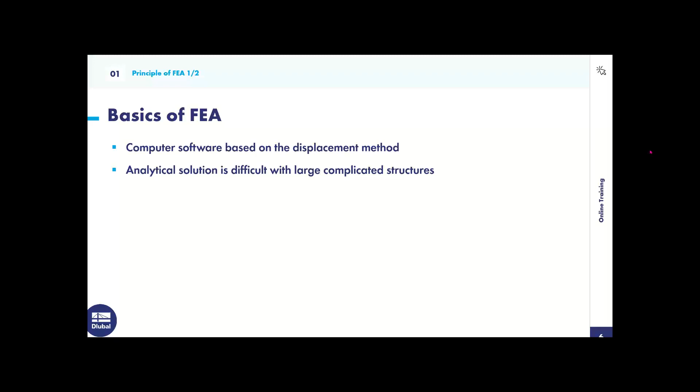So the structure within an FEA is converted to a finite interconnected element mesh, and then the material and cross-section properties are given at each finite element node. Once that's done, the mechanical behavior is transferred between these elements. A word I'd like you to walk away with is discretization. This is where the structure is being submeshed into finite elements.

So now we can go through the FEA calculation workflow. First, the local element stiffness relations or properties are determined. Then the program changes the stiffness relation at each node to the global coordinate system. Then the entire structure is assembled. Fourth, the support conditions are implemented into the structure. Then the displacement vectors are determined. And lastly, the support forces and internal forces are determined.

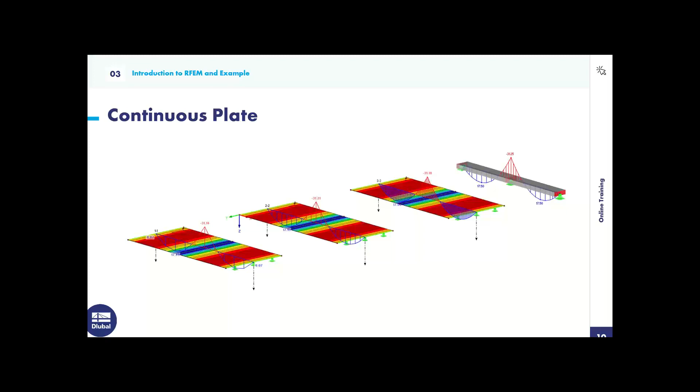So now I will just move into RFEM. One second. And now you should see RFEM. Right now I have an example up, and with this example, I will just be using this so we can go over the UI of RFEM and just the basics like tools and everything.

So to start off, RFEM is a structural analysis software capable of analyzing plates, members, and solids. Deformation, stresses, and internal forces can then be calculated for a 3D structure.

So just to go over again the basic UI, the project navigator on the left-hand side here, this panel is called the project navigator, and this is very important for model data. It includes all of your model data, everything that's modeled within your structure. For example, within this project navigator, things like members, you can expand and collapse all of these folders, such as members, and within these folders we have each member listed. This can also be done for nodes, lines, and materials, etc.

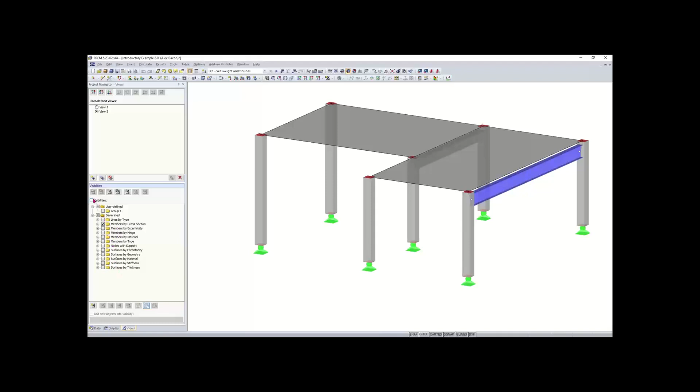The next tab we have is our views tab. Within our views tab, we can create visibilities based on these options down here. So if we turn on visibilities, we can create visibilities based on member cross sections. Right now, if I only wanted to show my W18 by 50, I could do that. Maybe I only want to show my rectangular columns here, or rectangular cross sections, my 12 by 12s. We can do that as well. And then you can also save visibilities, and pull them up whenever you'd like.

The third tab we have is our results tab. If I just run the results for this model quickly, then we will see our results tab pop up at the bottom here, only if we have results ran. So I just ran my load case 1, and if I turn off my visibilities, now you can see in my results tab, this is again similar to the other menus where we have our expanding and collapsing folders. Right now I have global deformations checked off, and we're viewing our resultant deformations.

And you can see we get a nice look at that, and then we can also check out our member basic internal forces, as well as our basic internal forces for our surfaces as well, if we would like. But we'll go over more of this in detail later, so don't feel too rushed to learn this right now. We will be going over all of this in the training. But just want to give a basic overview.

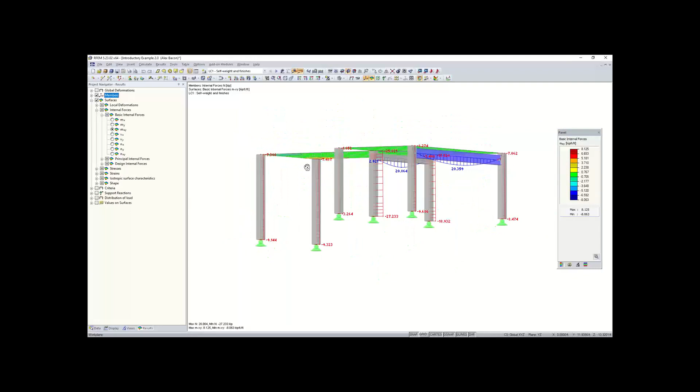Also, controls, very important. If you'd like to interact with your model, if you have a scroll wheel on your mouse, you can zoom in and out with the scroll wheel. Clicking down the mouse scroll wheel will let you move the model in translation. Holding control and clicking down the scroll wheel at the same time will also allow you to rotate your model. If you don't have a scroll wheel on your mouse, you can use the arrow keys on your keyboard to move the model around in translation. You can also hold control and use the arrow keys to rotate the model. And if you want to zoom in and out with the keyboard, you can use the plus and minus buttons.

One more thing before we get into modeling, I would like to go over highlighting. If you highlight from right to left, this will give you a purple box, meaning that anything that touches this purple box will be highlighted and selected. Highlighting from left to right, only things that are fully engulfed into this red box will be selected. So that's the difference between the two highlighting boxes.

So now, before we go into the model, I can go back to the PowerPoint. And I just have another question to ask before we get into the model.

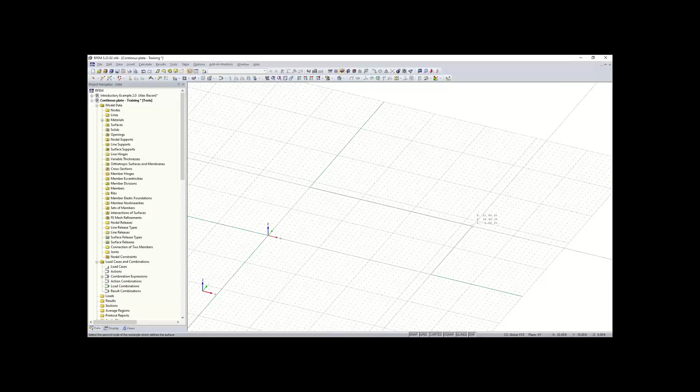Now you'll see that your cursor will turn into a reticle. What I can do is left click anywhere within this grid, and you can see the reticle snaps to these grid points here. I can click and draw this surface, and this surface is going to be 32 feet by 16 feet. So I'll go 32 feet in the X direction, and then 16 in the Y direction. Then I can just click, and you can see that this surface has now been created.

One thing I did want to change - if you need to edit your surface at all, or anything that you place within RFEM, you can easily edit it by right-clicking on it and going to Edit, or you can also just double-click on it. So I do need to change the thickness of this plate to 12 inches. I can easily do that by simply double-clicking on it, and you can also change your material and other things as well. So I'll click OK.

Now we can create the same plate again above this original plate. I can just go up here to my rectangular surface tool again, click OK, and now I'm going to model a second plate 5 feet above this one. Then I can click and just drag my cursor, make sure that this is 16 feet wide. So that will be right there. Now we have our two plates here modeled within the XY plane.

We'll go over work planes later in the training. So then we can simply create a third plate pretty easily, and to do this we can use our move and copy tool.

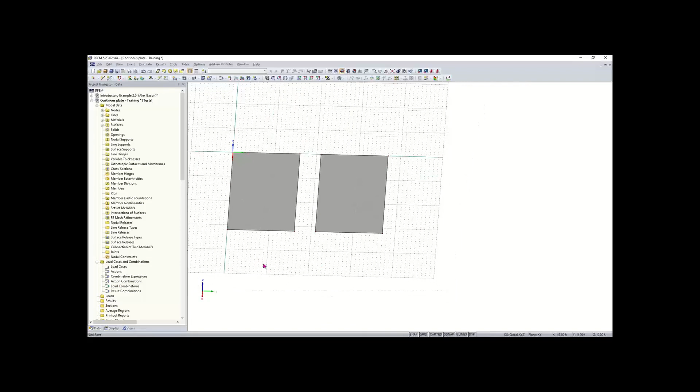So what I can do is rotate here, and I can simply just highlight the second plate, right click on it, and click move/copy. What this will allow me to do is make a copy of this plate and then just move it wherever I would like using displacement vectors here. I'm going to use this select 2 points and return, and this will give me a displacement vector by selecting the 2 points graphically.

So now I can just simply create one copy of this plate, and then create a displacement vector graphically - I'll select my bottom corner here, and I would like this copy to be 5 feet above this plate. So I'll click that, and I'll click OK. Now you can see that the copy was made, and it was made based on that displacement vector that I selected.

So the next thing we want to do is create our continuous beam. To do that, we're just going to be creating our member. You'll see that my plate is hanging off the edge of my grid, so to change the amount of grid points you have, or to expand this grid, we can simply go up here to our tool.

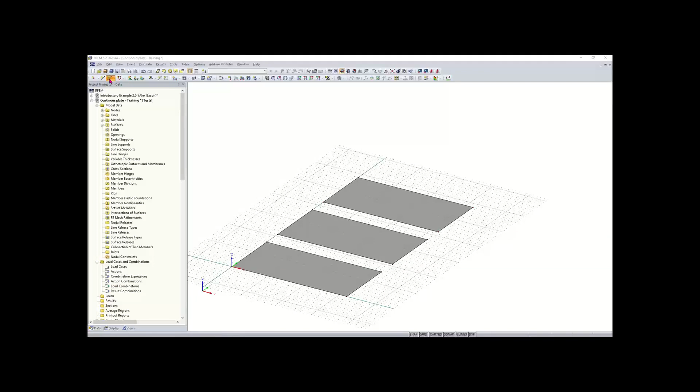And then once we click on that, we have our new member dialog box here. And we have basically a lot of information, but the one thing to focus on is just to input what our cross-section is going to look like. So we can just go over here to this button called Import from Cross-Section Library. We'll click on that.

And then this is similar to the material library, but you can see that we have our cross-sections here. We have rolled, built-up cross-sections, parametric thin-walled, parametric massive, and parametric timber cross-sections, as well as some other options down here as well. Right now, we'll just be focusing on our rolled I-sections here. Actually, my mistake. We will not be using the rolled I-sections. We're going to be using the, right here, the rectangular parametric massive sections. So we'll click on that.

And then once I click on that, you can see that I can enter the parameters for my cross-section, like the dimensions. So I can enter what the base is going to be, which is going to be 40 inches. And then my height is going to be 12 inches. And now you can also see down here that our material is by default set to 4,000 PSI concrete. So it's also per the older ACI standard.

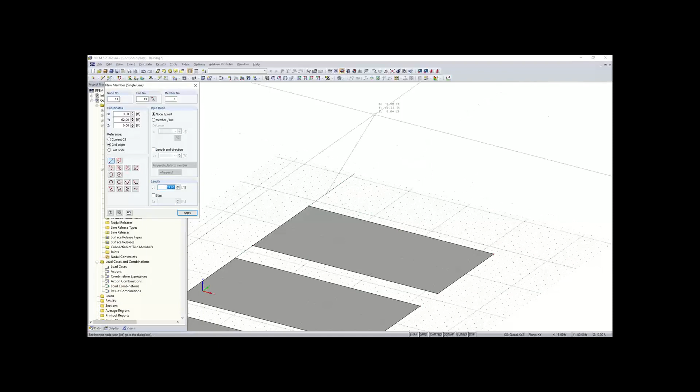And now we can simply just draw our cross section on our grid here. Again, the cursor snaps to these points. And I'm going to add this beam 5 feet away from my third plate here. So I'll left click, and now you can see that I can just draw, you see this line here, I can draw my beam, and it's going to span the same length as our plates here. So I'll left click again, and now you can see that our beam has been drawn. And now we have our 3 plates in our continuous beam right here.

So the next thing we want to do is we want to divide these lines here on the edge of our plates, so we can add a midspan here for supports. We also want to divide this continuous beam, so we can add a middle support as well. So to divide the lines, we can simply just right-click on the line. And again, when you right-click anywhere or on any object, you get this shortcuts menu. So we can just right-click on this line to divide it. And then we want to go up here to divide line.

And you can see under divide line, we have multiple options for dividing a line. So we can do it by distance. And you can see when I pick that divide line option, we have these gray arrows here on your lines. And these arrows tell you the orientation of the line or the direction that you drew the line. So this would be the start, and this would be the end of the line. You can also view these arrows by just hovering over any line that you've drawn.

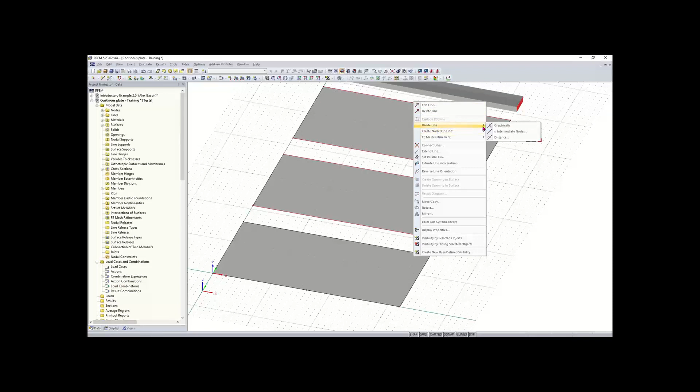So now we can do this for the rest of the lines, and we can easily just hold Control and select the rest of these lines here. Right click. So holding Control and selecting options will allow you to select multiple options. And then we can just do this by a distance again. Everything's set here. You can see the multiple lines have been selected. I'll click OK, and now we have these nodes placed in the middle of our lines here.

Now we would just like to divide our continuous beam up here. It's similar to the lines. I can just right click on the beam, go to divide member, and the third option would be graphically. So graphically just allows you to select graphically where you'd like to place the node. I'm going to place it right in the middle here at 16. And now you can see that our member here has been divided. I'll rotate the model to get a better view.

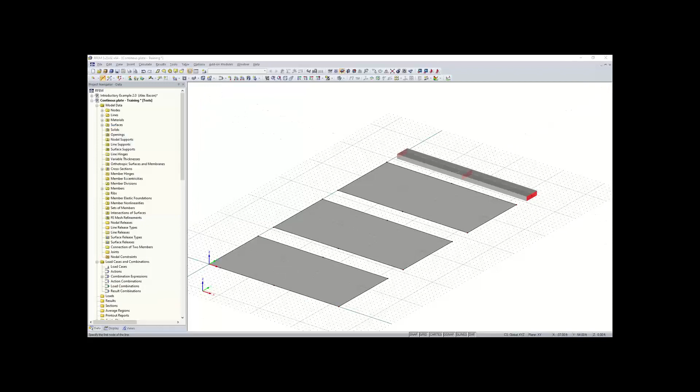And now that our members and lines have been divided, for our plates, we can draw a line down the middle of them. And the reason we are putting this line down is to later on add a line support there, so we have some mid-span support. So we have an option up here called New Line right next to our New Single Member button. So I'm just going to click that.

Now you can see this box opens up here, and what we can do is just draw our line within our work plane here. I'm just going to select snap to and select this first node here, and then I'm going to draw it and snap to the second node. And you can see we have a nice perpendicular symbol there letting me know that the line is perpendicular. And I can right click anywhere or hit escape to exit out of that tool. And now you can see that our line was drawn.

So now that this line has been placed, instead of having to redraw it, we can simply just click on it and hold Control. If I click on something and hold Control and then drag it, that'll make a copy of it. Oops, let go of Control too much. So this is a great workflow for working with anything in RFEM. You can simply just highlight something, hold Control, and then make a copy of it and drag it and snap it to anywhere. So it's pretty efficient.

So now we can add in the nodal and line supports. First off, we'll add in our line supports for our plates here. And to do that, we can go up here to New Line Support. And this line support is going to have certain conditions to it. So what we can do is click on this button here called Create New Line Support. And you can see here that we have our support conditions down here. Basically, this first section here is for fixing your conditions in translation, or you can also fix your degrees of freedom in rotation here.

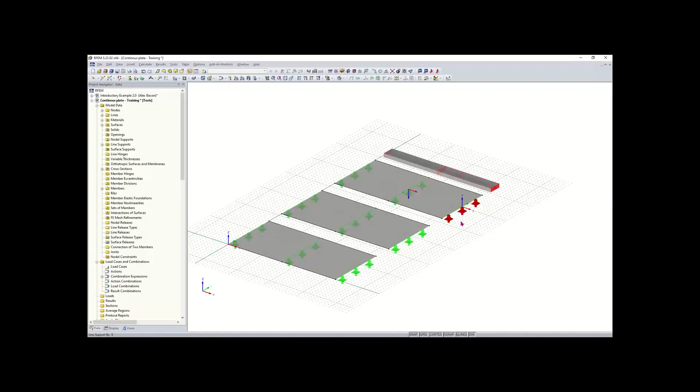Now we just need to add nodal supports to our beam here. So we added line supports to our plates. Now we want to add just nodal supports. So to do that, we can go up here to New Nodal Support. And you can see by default that hinged is already selected here. So instead of having to go in and create a new nodal support type, we have hinge selected already. So we can hit OK. And now we can select our first end node here, and then we can select our middle support.

And this last end support is going to have different conditions than these two supports here. So we can go up to nodal support, and we can create a new type of support. This support will be the same as a hinge support, but the rotation about the local x-axis will be restrained. So I'll click OK again, and now you can see that that support is a little bit different. It can't rotate about the x-axis, so it's locked. And now all of our supports are defined.

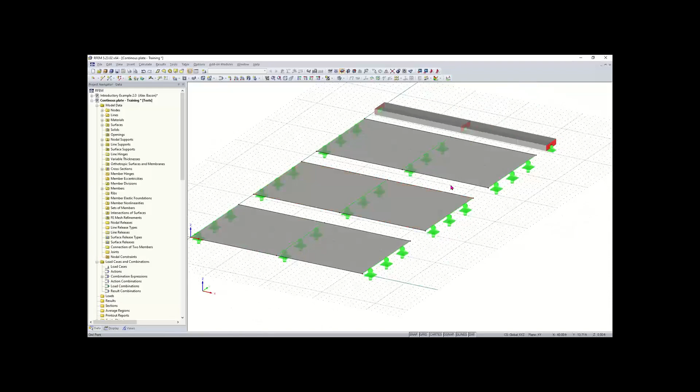So now that our supports are defined, we can get into loading. So now we would like to load these plates and this continuous beam. It is important that we create a new load case because every load within RFEM needs to be assigned to a load case. So I can go up here to either edit load cases and combinations, or we have a button here called New Load Case. So I'm going to click on the New Load Case button.

You can see the program has automatically created a new load case for me already. For this load case, you can add a description here, and for this one, I'll just call it dead load. And you can see the action category is set to dead. We don't need to worry too much about that right now. But right here, you can see we have an option for activating or deactivating self-weight. So for this example, I'm going to deactivate self-weight. And now our load case has been defined, and we can click OK.

So now you can see up here we have our drop down telling us which load case we're under, and you can see I had load cases and combinations automatically generated based off of standards. So now the program has generated some load combinations and result combinations, but we don't need to worry about that right now. We just want to stay under the dead load so we can add loading to these plates and continuous beam.

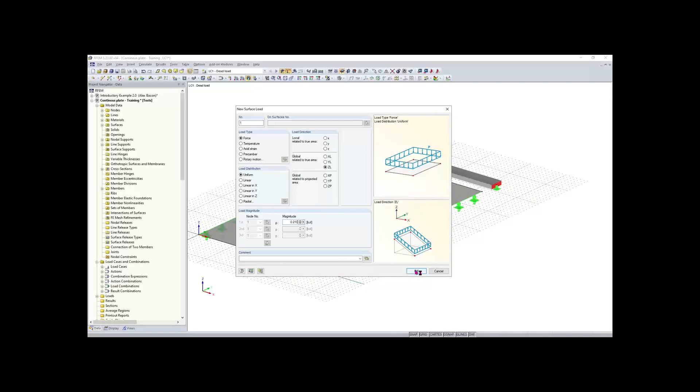And now we just want to add a magnitude to our load. So this will be a magnitude of 0.21 KSF. And now we can click OK. Once we click OK, you can see that my cursor has changed here, allowing me to select surfaces within my model. And once I click on a surface, you can see that those loads are being generated onto the surface.

You can also notice that my loads are pointed up in the positive Z direction. I would like those to point down, so what I can do is simply highlight them and double click on them. And then I can add a negative sign in front of my magnitude here. And once I click OK, you can see that the loads will be swapped.

Next thing we want to do is add a uniform load to our continuous beam here. Again, up here with our tools, I want to choose a new member load. Keep in mind that the member load tool is for members only, and the new line load tool you want to use only for lines, when you're applying loads to the perimeters of surfaces, for example. So we'll choose new member load.

And again, this is similar to the surface load, where we will have a force as the load type. The load distribution is going to be uniform, and the load direction, again, is going to be in the global Z direction. I'm going to add in a magnitude of negative 0.21, which will be kips per foot. I'll click OK. And now you can see that my cursor has changed, allowing me to select my two members here.

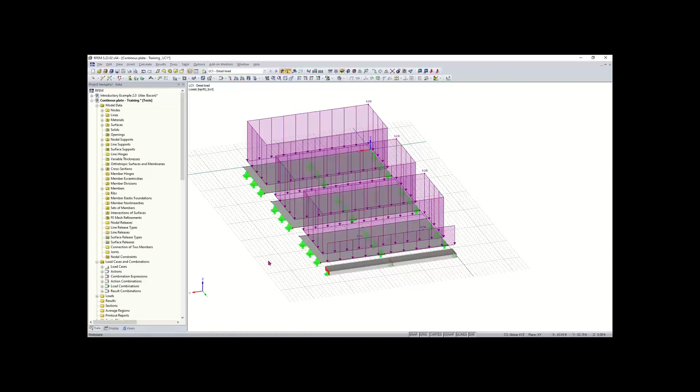Okay, yeah. So if you've drawn your loads here and you want to edit them, you can simply just double click on them. If you just double click on one, that'll allow you to edit just one load. Also, if you need to highlight all of your loads or a couple loads at a time, you can highlight them and then double click on them, and that will allow you to edit them.

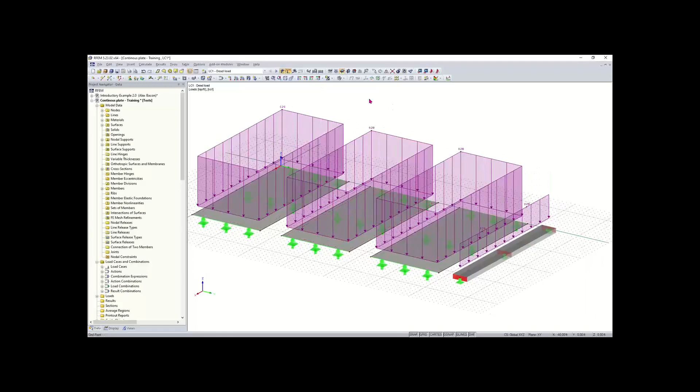Great, thanks. You're welcome. Yeah, so now that we have our loading, we can now move on to creating FE mesh refinements. So within the program for surface elements, an FE mesh is generated, and right now our FE mesh is set to about 1 foot for the length of our finite elements. If you're a little confused by that, we'll get into more of that later. But for now, we would just like to add an FE mesh refinement, which allows us to change how fine our FE mesh is going to be for individual surfaces.

So to do this, I can simply just right click on my surface here, go to FE mesh refinement, and then click on new. And for this, I'm going to just create a new FE mesh refinement here using this button called create new FE mesh refinement. You can see that surface 1 is selected, so I'll click on that. And right now we just have surface selected, which is automatically done by the program, and we can set our target FE mesh length.

So I want to set mine to 0.2 feet. This is smaller than the 1 foot default that is already selected globally in the program, so I'll click OK. I'll click OK again. And now you can see that we have this little icon here telling us that an FE mesh refinement has been applied. Now we want to do that same thing for our other 2 surfaces here.

Again, we can right click on this surface and add one, but we can also go into our project navigator here on the left-hand side, and we can scroll down to FE mesh refinements. I can expand that, and you can see we have one for surface 1. I can right click on FE mesh refinements and click on new FE mesh refinement.

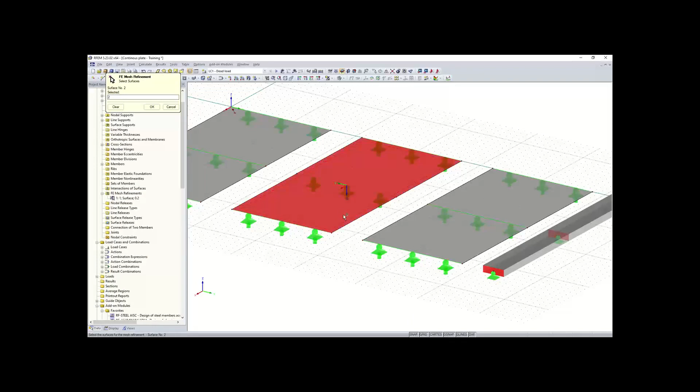And now I can just click on surface. It's wondering what surface I want to apply this to. I can type in the surface number, or I can select the surface graphically. I'll click OK. And for this surface, I just want to increase the FE mesh length just so we can get an idea and compare results later on to see how our results change depending on FE mesh length.

So I'll click OK, and again we get that icon, and then I'm going to do the same thing for this third surface. So I'll just right click on it, and then I'll create a new FE mesh refinement, and then I'll just make this 0.8 feet. So you'll see that they'll be increasing down the line. I'll click OK again, and you can see that that icon has been placed there.

We have another quick question unrelated to the FE mesh, which maybe you can just address quickly. Okay. One of the attendees noticed that you selected concrete for one of the materials. They're wondering, what does the RF-CONCRETE add-on module do then? How is the add-on module different from RFEM is what you could quickly explain.

Okay, yeah, so basically the material for concrete has been selected within RFEM here, and you'll see later on when I run results that in RFEM you just get things like the global deformations, the internal forces, support reactions, etc. But if you want to design, let's say, your slab here for reinforcement, that's when RF-CONCRETE Members or RF-CONCRETE Surfaces would come in. So we have 2 different modules, one for surfaces and one for members. So basically the add-on module is for designing the reinforcement.

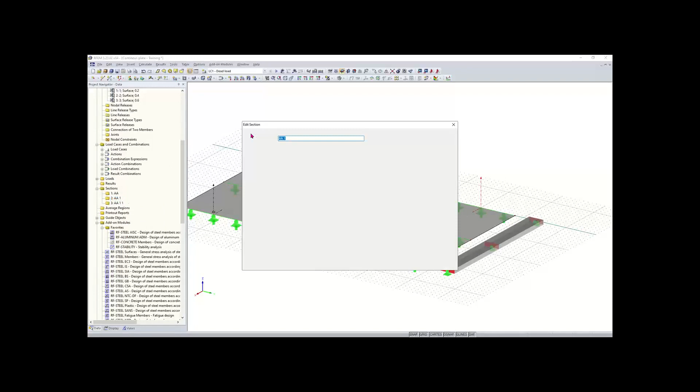You can change the section name if you do that within the project navigator by going over here to sections, and then you can simply edit a section and rename it. I'll make this one AC, and then my other section will be AB. Yeah, so click OK, and now everything is basically ready for calculation. So we have our surfaces and members along with our supports and loading.

So again, you can turn off the loading, like I don't have mine shown right now, but you can turn on and off the loading up here with this button. I'll turn it off for now. And now we can go up here to our toolbar and we can click on this button called Calculate All. So once we hit Calculate All, the program will go through and run the calculations. It should only take about a minute or two. It all depends on the size of your model and the complexities.

And then once this runs, the first thing we should see is our global deformations, and those should be shown. And then we can get an idea of our internal forces and things like support reactions. So now you can see that we have our global deformation shown right now. You can see we get a panel over here on the right-hand side. And this panel is basically the legend for our colors here. And you can see that we have a max displacement of 0.022 inches.

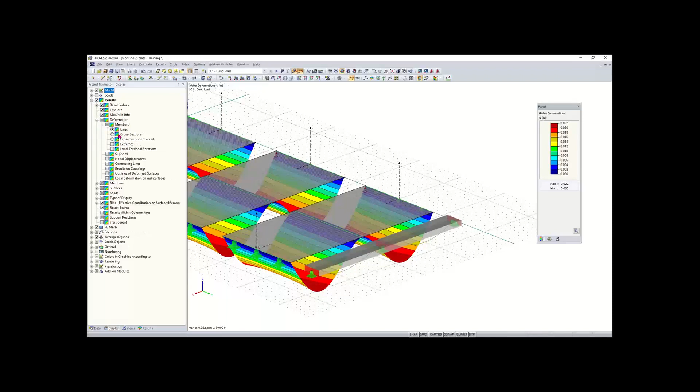And then we can also view the deformations on our member here. Right now, we just have that set to a yellow line. But if we wanted to have a colored cross-section for this deformation, we could go to Display, and then we could go to Results, Deformations, Members, and we could select cross-sections colored. So now we get a nice color section here.

We can also take a look at our member internal forces. So I can check member, and now I can just look at my axial forces. Right now we don't have any. I can get a look at our moments, and we can get a nice moment diagram there.

And we can also take a look at our internal forces of our surfaces. So we can view the basic internal moments along the x-axis.

Every element has a local axis, referred to with lowercase coordinates. If I hover over any element, it'll give me the local axes for the plate. If we want to see the local axes of our member, we can right click and click on local axes, and now we'll get that for all of our elements.

So I can right click again. Quick question, one of the attendees is asking how to find the optimal mesh for the analysis. Yeah, okay.

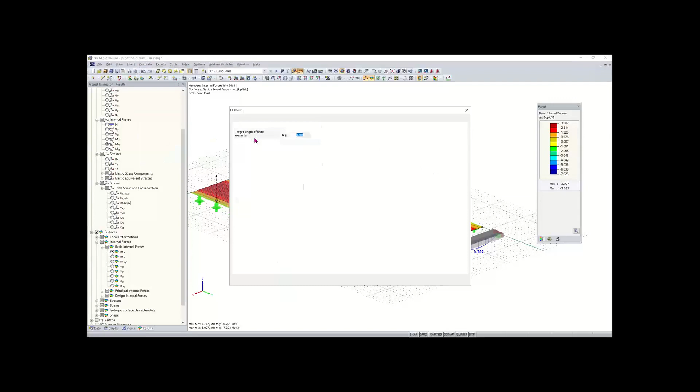The optimal FE mesh for analysis is a little tricky. There's not an actual specific length that you would pick for your FE mesh for a certain model. Basically what you can do is adjust the FE mesh by going up here to calculate, and you can go to FE mesh settings. This is the global FE mesh settings for your model, and here we have our target length of finite elements, which you can change.

Finding the correct FE mesh is basically just a guess and check. You can take a look graphically if you zoom into your model at the FE mesh and make sure it looks good. But then also you can run the results of your model with a certain FE mesh length, change the FE mesh length or make it finer, run your results again, and compare those results to see how much they've changed. You can keep doing that until your results don't change, or the difference between your changed results is small.

Exactly as Alex mentioned, it's basically just running a test and trial type process where you continue to decrease the FE mesh. If your results are changing significantly, then you know your FE mesh is not refined enough.

The other thing I wanted to point out, if you go to calculate, FE mesh settings again, the third tab is called Adaptive Mesh Refinement. This is something we're not going to get into today, but essentially the program will run that testing process for you. You can set the number of iterations, the load case or combination to consider, and the program will run a quick analysis in the background, check the results, and refine the FE mesh in certain areas of the model, essentially creating the FE mesh that is optimal for your model.

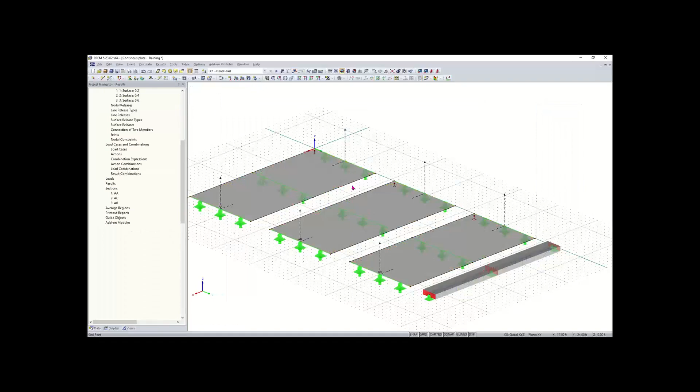Once this is done, we click OK, and it's going to say that this action is going to require me to delete my results. Do I want to continue? I'll hit yes, and now I can rotate my model again.

Once I've done that, now it's going to make me recalculate. And then once I recalculate, you'll see that the results are going to change just a little bit, mostly the bending moments, because instead of RFEM taking into consideration shear stiffness, it's just going to assume an infinite rigid stiffness for the shear. I'll get into that just in a little bit.

So basically, this is because the methods used in school assume an infinite shear stiffness, when in reality there are some shear deformations for bending. So just keep this in mind when comparing hand calculations of deformations with RFEM.

So now back to the PowerPoint, we can go over some plate theory. So now I'll take this back to the PowerPoint. Let's get back to that slide.

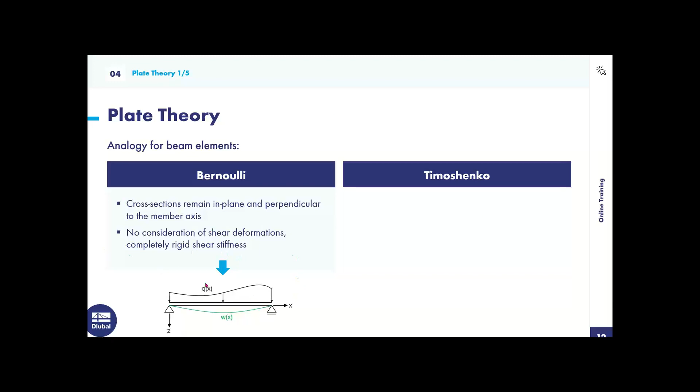These first theories are going to be analogies for beam elements. The first theory is Bernoulli's, and the second is the Timoshenko theory. The assumptions made for Bernoulli's are that cross sections always remain in plane and perpendicular to the member axes, and that there are no considerations of shear deformations, with the shear stiffness being completely rigid for our member.

So now I just want to show a graphic to represent what I just mentioned. Here you have Bernoulli's, and you can see the deformation is perpendicular right here to the member axes. Then for the Timoshenko theory, we have an additional angle, and that comes with additional deformation, due to the additional shear deformations or shear stiffness taken into consideration.

So these two theories we can apply to plate theories. An equivalent analogy for plate elements: we have the Kirchhoff theory, and the Reissner-Mindlin theory. The assumptions for Kirchhoff are similar to Bernoulli's theory, but for plates, and the similar theory from the Timoshenko theory is the Reissner-Mindlin.

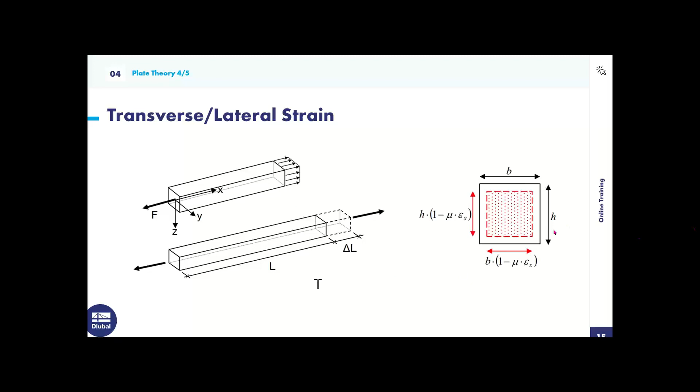Just to summarize, for the Kirchhoff theory and Reissner-Mindlin theory: Kirchhoff normally yields great results when very thin plates are used, for example concrete slabs. You have to keep in mind that this only considers pure bending load-bearing capacity, and this is just a simplified approach. For Reissner-Mindlin theory, shear deformations are considered, and this is better for thick plates, and also when shear influence from components is relatively high. There's also significant error when neglecting shear forces, so this is better for more accurate shear forces and is a higher value approach.

In my opinion, the Reissner-Mindlin theory is what you should be using most of the time, but I just think it's good to know the difference between these two theories.

So now what we can do is move back to the program. And within the program, we can go to calculation parameters.

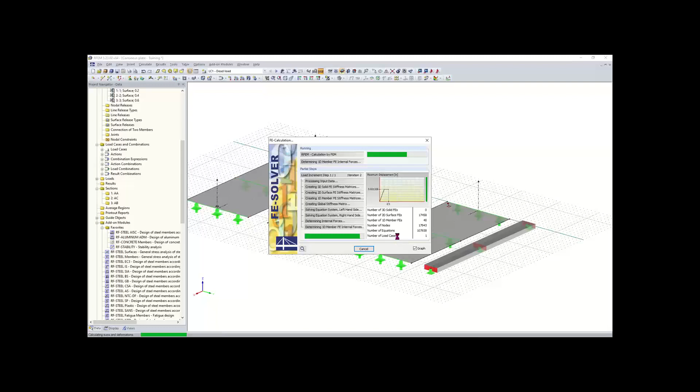Yes, it is possible. That's something I should have mentioned in the beginning. You can change your units of your results, and units in general, by going up here to options, and then to units and decimal places, and this dialog box will pop up. Within here you can change the units of any result. Up here you have tabs, and you can go to results, and then here you have deformations.

You can change the results of your internal forces here, too. You have a drop down, and you can change between any of these units if you like. You can also change your decimal places as well. And if you want to change between imperial and metric, you can do that at any time throughout your modeling.

So those results ran, and maybe you can remember a little bit from the results before, but you can see that they've changed slightly, maybe by 0.1 or 0.2 kip per feet.

So now that we ran that, we can also move on to another question. I'm going to go back to the PowerPoint, and I would just like to give a quick question. One second. So now this question should pop up in the PowerPoint. If you just want to, you can enter your answer in the chat, and I'll give another 30 seconds to a minute for that.

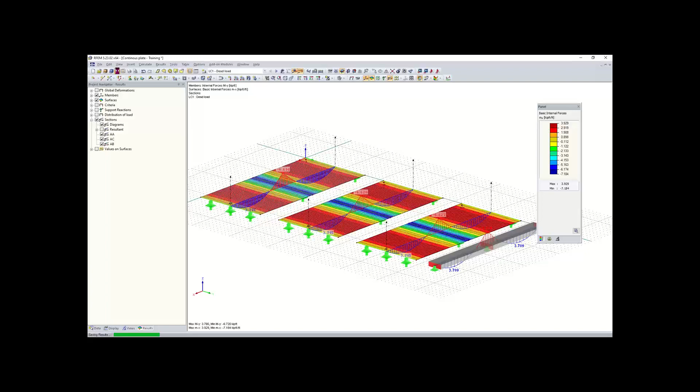So what we can do is we can open up a new model. We can also save our model for our continuous plate by hitting the Save Model button up here. And that'll save our model. And now what I can do is I can click on New Model.

And within this new model general data tab, like I said before, we can just type in our model name. So I'll just name this one Euler Case 1 example training. We don't have to add a description. We don't really need to generate combinations automatically. So it'll also be a 3D model, and everything here is set by default, so that's good. So we'll click OK.

And now we have our blank workspace here. So what we're going to do is just create one single member, and this is just going to have a new cross section. So what I can do is go up here to new single member. I can click on that, and now I can create my cross section here again. So I can go to import from cross section library. And then it's going to be an I section. So I'm going to click on I section.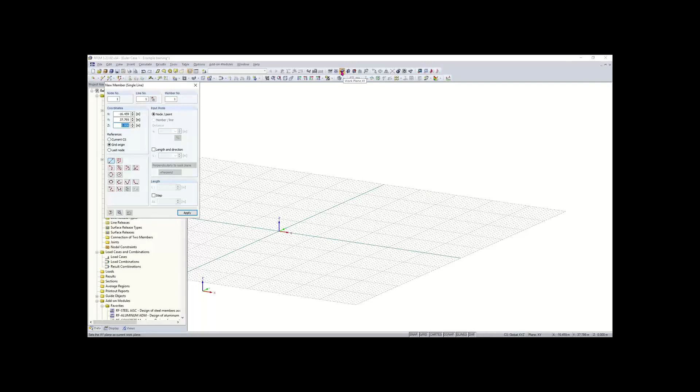And now I can draw my member. So maybe I want to draw my member perpendicular to this grid here. What I can do is I can check off this box here called length and direction, and I can set this perpendicular to work plane if I want to draw it perpendicularly. Or what I can also do is just change my work plane up here using these buttons. So right now it's set to work plane in the X and Y plane. I can change my work plane to the YZ plane, or I can change it to the XZ plane.

I'll keep it on the XZ plane, and now I can just select my origin here by left clicking, and I want this column to be 30 feet high. So what I can do is simply just go up here, left click, and now my column has been drawn. I can right click to cancel out of this, and now our column has been drawn.

So now the next thing we want to do is just add in a rigid support. So I can highlight from left to right this node here. I can go up to nodal support, and right now it's set to hinged. Instead of having to define a rigid support, what I can do is just hit this drop down and select rigid, and you can see that all of the degrees of freedom here from translation and rotation are all fixed with these check marks. So now I can click OK, and I can zoom in here and you can see that my rigid support has been added.

And now our Euler Case 1 has been created. And what I can do is create a new load case for it. So because I need to add in loading, I can go up here to new load case.

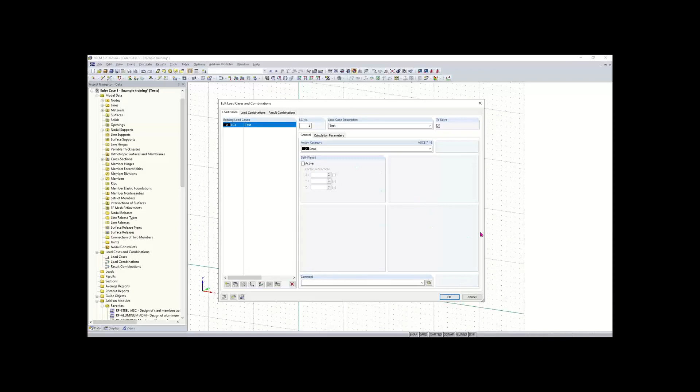And I can just name this load case test. And the action category is just set to dead. Again, we're going to deactivate self-weight just for hand calc reasons. Normally you want to keep self-weight activated at all times for design. So we'll click OK.

And now we can create our new nodal load. So to add a nodal load instead of a member load or surface load, we have a button here called new nodal load. We can click on that. And this box should look pretty simple. So we have our node selected up here, and then we just want to tell the program the force and what direction it's going to be in.

It also looks like I'm still in metric, I have kilonewtons, so let's change that down here in this units button at the bottom. So I'm going to just change this back to imperial. I'll click OK. Oh, it's asking me. Yep.

So for this load, we're going to add in a -5 kips in the z direction. And you can see that loading has been shown here in the graphic. And then also I want a lateral load in the x direction of 2 kips. So we'll add that. We'll click OK.

And it looks like I had my node down here selected before I went into my tool up here. So what I can do is I can just double click on this loading and change the node. Or I cannot change the node there. So what I can do is just drag this loading to this top node here, and there we go.

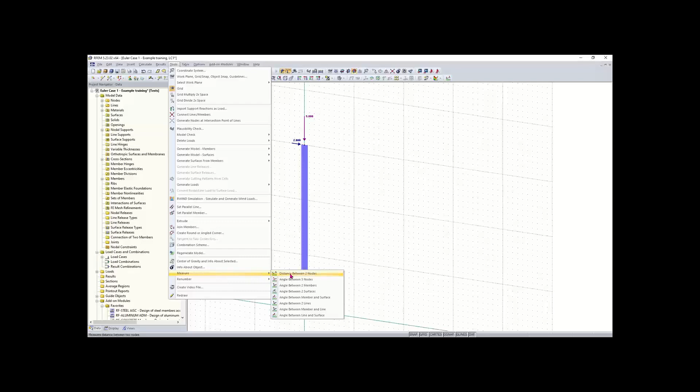So now that our loading is on the top of our column, I also want to make sure that my column is still 30 feet tall. So what I can do is go up to tools, and I can go to measure, distance between 2 nodes. I can click on these 2 nodes. Yep, so it's 30 feet tall. I'll click OK.

And so now what I want to show you is something important. This is very important for calculations of structures within RFEM. What I can do is click on calculate all, and I can run the calculation for this column. And now you'll see that my deformation is shown here, my resultant deformation.

I can also go here to member and again show my internal forces. I can show my moment about the local y-axis here. I can get an elevation view of that. And we can take a look at our deformation in the x direction, 3.782. That's 3.782 inches. And now I want to show you how this linear or first order calculation differs from a second order calculation.

So just to clarify on that, if I go to edit load cases / combinations, and we're looking at this load case that we've just put loading on and we've created. If I go over here to my calculation parameters, you can see we get our method of analysis right here. So generally, load cases are calculated based on a first order analysis, and load combinations, which we didn't get into, are calculated based on a second order analysis.

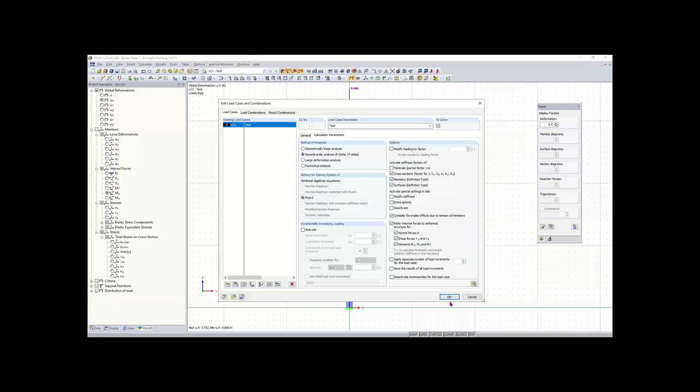And the second order analysis bases the equilibrium on the deformed system, so that the deformation and bending moment is going to be increased because of the larger deformation. So if I do that and then I click on calculate all, you should see that the deformation has increased from 3.7 to 3.9 inches.

And also our moment here at the bottom has increased from about 60 kip feet to 61.6 kip feet. And this is because of the P-delta effect. So since the deformation has increased, the applied axial load has an increased moment arm, giving us a larger moment here. So keep in mind you will get two different results with these different analyses.

One note also, members in RFEM, like this one, are determined to be a beam or column internally based on how the loads are applied. In this case, we have a column because the majority of the forces that are applied are axial.

Maybe just quickly we can go over member types, just the basic ones. So if I double click on my member here, you can see that my member type is set to beam. So that takes into account beam or column. We also have rigid for infinitely rigid stiffnesses, and we also have ribs, truss members, but we won't get into any of these types today, but they're just good to know. If you're designing a beam, or if you're drawing a beam or column, then always keep the member type as beam.

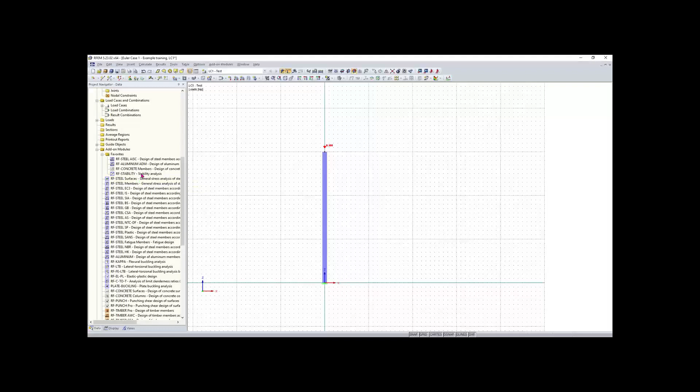what we can do is we can go into our RF-STABILITY add-on module. So that will be something that all students have access to. So I can go down here to add-on modules, and you're probably going to have a long list of add-on modules here. I favorited the ones that I use most frequently. If you're having trouble finding the RF-STABILITY add-on module, you can go up here to add-on modules, then others, then stability, and then RF-STABILITY.

And so basically all of the add-on modules look pretty similar to this. All the add-on modules are basically just a dialog box. And within this dialog box, it'll take all of the data from RFEM, such as materials, cross-sections, members, everything. You don't have to worry about redrawing or modeling anything. It's all taken from RFEM. And this add-on module, RF-STABILITY, is very useful.

So just to explain, RF-STABILITY uses the help of eigenvalues and different eigenforms to perform a stability analysis. So just some background information. Euler was a mathematician who came up with different cases to show the critical factor along with the critical load and lengths for a structure. So this is something every stability analysis does.

And in order to get the different buckling cases, I will simply have to deactivate the minimum initial pre-stress for cables and membranes. And then it is also important that we activate the division. It's already by default, but activate the division for straight members, so I can keep that checked. And then there's also this edit button right here next to that criteria. I can click on that edit button.

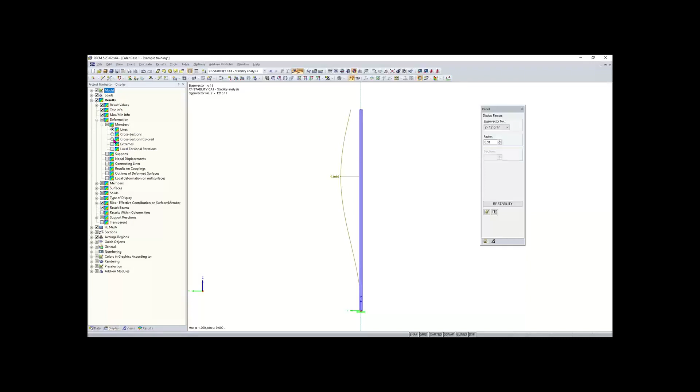So I can go down here to graphics and hide my panel. So we have our panel here on the right-hand side, and what I can do is go through my different eigenvectors. I can twist this around. And what I can also do is go to display here, select colored cross sections, and this gives you just a better idea of the deformations, and then I can cycle through those different eigenvector numbers. So that just gives us a better look at the first buckling case or buckling form.

I think it is clear also that the column will first be unstable in the weak axis direction. So basically the axis of this column is in the y direction or about the local z axis. So for clarification I can just turn on my local z axis. And this is because the smallest moment of inertia is in the y direction or about the local z axis.

And to double check that, I can double click and go to info about cross section, and you will see that my smallest moment of inertia here is about my z axis, 24.5 inches. So that gives us an idea of our moment of inertia there, giving us our weak axis. And now we can jump back to RF-STABILITY by simply clicking on RF-STABILITY here. And we can take a look at our effective length factor by going to effective lengths and critical loads. So we have our weak axis and strong axis for both our effective length and effective length factor.

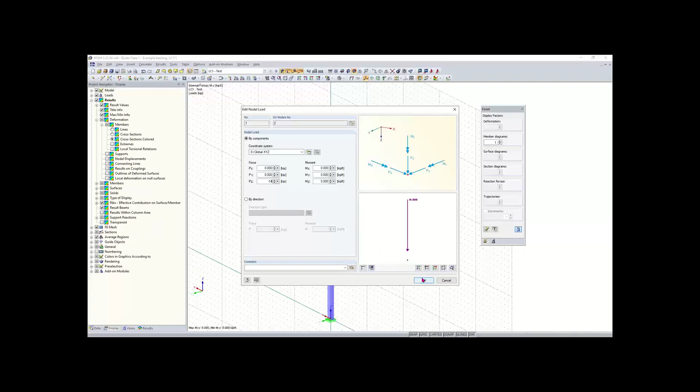We can also show you what it looks like if the structure is unstable. So maybe you have a structure that's unstable because the loading is too high. So for example, I can click OK, and then go back to my LC1. So let's say my structure is unstable, I've increased my loading, it's too high. Maybe I'll make it negative 14 kips, and then I'll click OK. So now my loading's too high. We can see that by calculating the results.

Keep in mind, I also still have P-delta or second order analysis on. So you'll see an error message, calculation errors and messages. It'll say something like the stiffness matrix is singular, and it'll explain that it's possible to calculate the critical load factors and buckling in the add-on module RF-STABILITY. So we can close out of that, and the first thing you want to do is make sure that your load cases are being calculated based on a first order analysis. I want to change mine back to a linear analysis.

So now that I've done that, I can jump back to RF-STABILITY. Within RF-STABILITY, I can keep all this the same. You'll see that the load case or combination that it's referring to is LC1. I'll click calculate. And once that's done calculating, you should see that my critical load factor here is below 1. So since my critical load factor is below 1 at 0.966, that means my structure can only take about 96-97% of the loading that is applied.

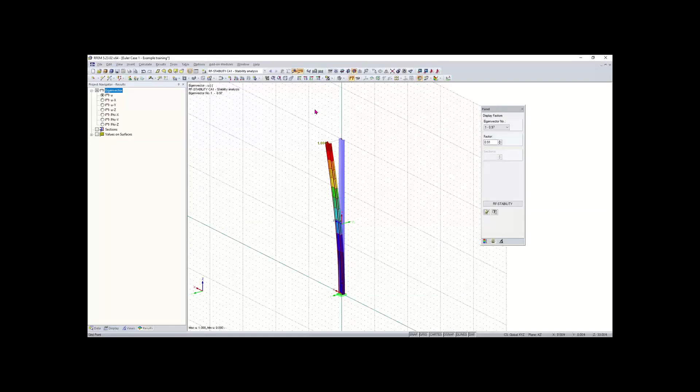So now what we can do is go back, click OK. Since our critical load factor is below 1, what we'd want to do is just decrease this loading in our LC1 up here. Again, you can select your load cases and combinations up here with this drop-down window that tells you which one you're under. And now we can move on to modeling our moment frame.

So since our critical load factor was below 1, I'm going to decrease my loading to -5 kips. I'll click OK. And now I want to change the height of our column. So I can simply highlight this node here, double click on it, and then I can change the height by changing the z coordinate to 10 feet. So this will be the height of our moment frame.

Actually, before we do that, let's save this model. This will be our Euler Case 1 model. And then what I want to do is go to File. I want to save a copy of this model. I can save this copy as our moment frame. And then what I can do is open that copy. And now we can turn this column into our moment frame.

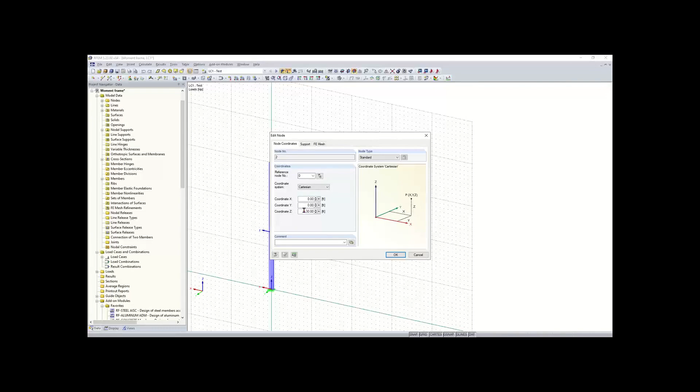So I can highlight again this node here, double click on it, shrink this to 10 feet. And now I just want to make a copy of this column. So I can just highlight the whole thing, hold Control, and then simply drag this column. Want to make that 10 feet in the negative x direction, or actually, I want to make that in the positive x direction, and it's going to be 10 feet away.

And then what we can do is create a beam spanning between our columns here. I can also just hold Control and, oops, I can Control Z to undo that. What I can do is just hold Control and move this loading over. And now I can draw a beam that will span between the two columns. And this beam is going to be a W8 by 15. So I'm going to import that from our cross-section library.

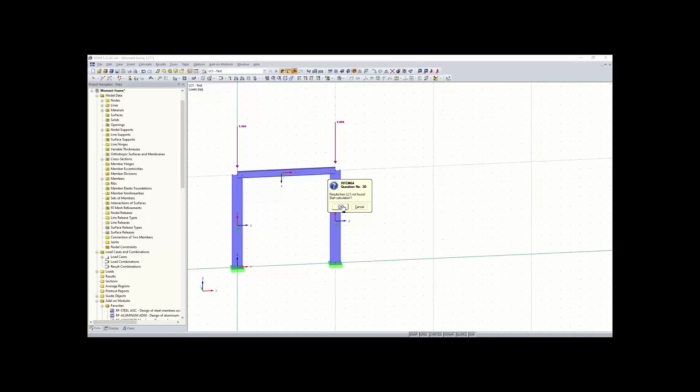I'm going to go to I sections. And then I'm going to go down to 8 by 15, again leaving all these filters the same. So that'll be an 8 by 15. I'll click OK. And now we can draw our beam here, and that'll span between these two columns. And I can right click and cancel out of that. And now I can run my calculation. So we just turned that column into a simple moment frame.

And now we can get our global deformations and see what those look like as well. We can also take a look at our internal forces by checking off members here. So we can look at the axial forces.

And then if we want to get a better idea, we can also add in some lateral forces as well. So we can add in 2 kips in the x direction for both of these and rerun our calculation.

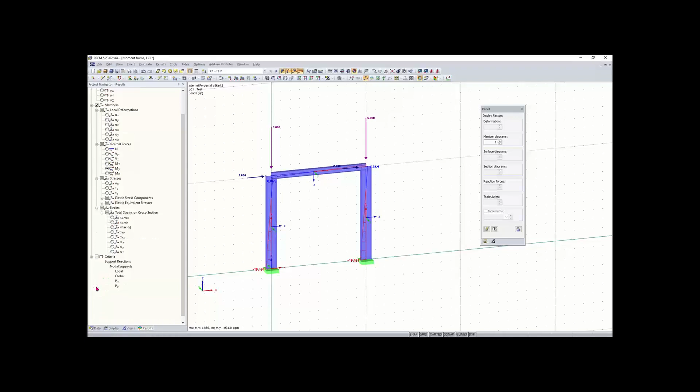So now we can get a look at our moments from our lateral loading, and then we can go down here and take a look at our support reactions. We have our support reactions here, and we can also get a look at our moment reactions as well. Those are defined based on the double arrows here.

Another good thing is you can turn off your grid if you just want a cleaner view of your results. You have these buttons down here to turn off your grid. Then what we can do is go to our stability and take a look at our critical load factors. So we can hit calculate.

We can see that our critical load factor is pretty high, which is good. We can check out our eigenvectors, get an elevation view of that, and we can cycle through these.

You can see we have some out of plane deformation, so maybe this frame will have some lateral supports, some pinned lateral supports up here to keep it in plane.

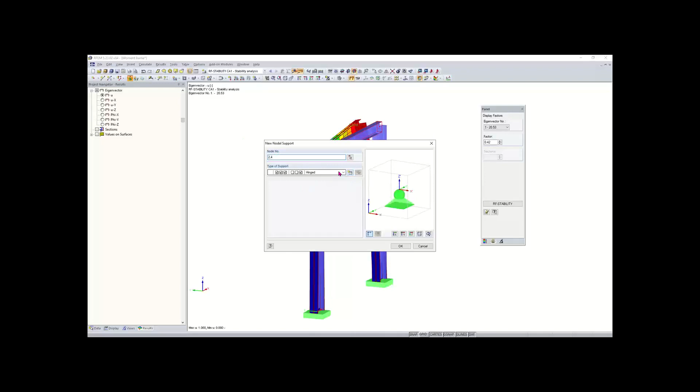So what we can do is hit new type of support. This support would allow it to move in the Z direction and the X direction, but keep it in plane in the Y direction. The rotation for this pin support will be all released. We'll click OK again, and then we can hit calculate.

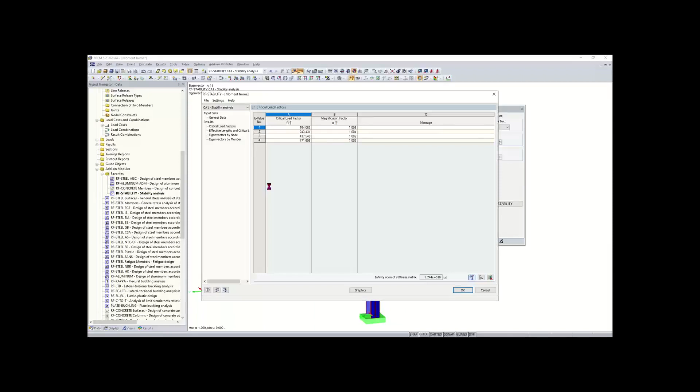RFEM will run through these calculations again, and then we can take a look and see how our eigenvectors have changed based on the supports we added here. You can see that we don't have any out of plane deformations at the top here. Also I'm sure our critical load factor has changed. It has increased from 20 to 164, so just adding those supports has helped a lot.

And so that's the end of the calculations and modeling for our Euler Case 1 example and for our moment frame.

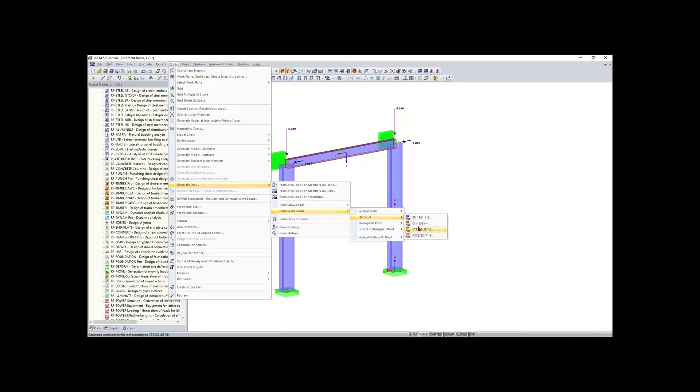Wind loads, Alex, you can show how under the tools generate loads, and then there is the option here for wind and snow loads according to Eurocode primarily and the US codes. But these are really for general rectangular structures. So if you have anything outside of a rectangular structure, you'll need to manually apply it as we've been showing.

Yeah, so basically, like Amy said, those are basically for pitched roof or rectangular buildings. But I guess you can also just create a new load case as well, and then just create your wind load case and add in your lateral loads or lateral uniform loads as well.

Another quick question, going back to the beginning, when you create a new line or maybe a new member, how do you modify if you notice your dimensions are not accurate?

So creating a new line, again, you can use this tool. If the dimensions are not accurate, I guess I would interpret that as the length maybe, or if you're talking about the length not being accurate. Yeah, I think it's just showing how to modify node coordinates, or dragging and dropping, multiple options.

Yeah, so right now the cursor, when you click, is always going to draw the line in the grid that you have placed. This is like the work grid, and right now mine's in the XY plane, so I'm going to draw in the XY plane.

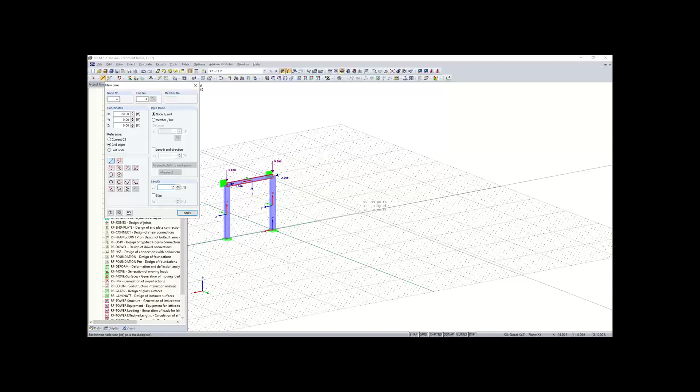Maybe if you click and then you just want to type in your coordinates up here, you can do that, and just type in the coordinates you want the end of the line to go to. Also, you can see my length is highlighted right now as 9 feet, but if I just want to type in 10 feet and I don't move my mouse at all, I can hit enter and that'll give me my magnitude and the direction I have it pointing.

So those are just a couple options when doing new lines. Another good option is to check off the length and direction here, and then I can just type in, say, 10 feet, and you can see that my line will be placed perpendicular to my work plane here as well, if I click. So those are a couple options for creating new lines.

I think that answers a majority of the questions for now, and we'll just continue to ask them as they come up, or I'll answer them individually. Okay, awesome. Yep, good questions. Thank you, Amy.

So we'll just go back to RFEM. And now that RFEM's up, we can simply just create a new model. So what I can do is go up to the new model button. And once I click that, we have our general data where I can just enter the name, concrete model. I'll just name this one concrete model training.

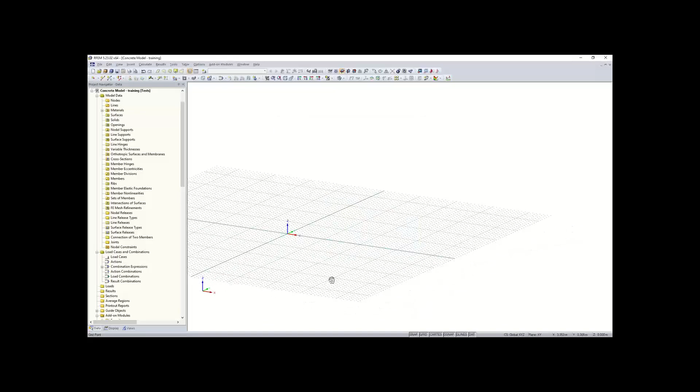Something else I might want to do before drawing this rectangular slab is set my grid to dynamically adjust according to the size of the model, so that it changes automatically and I don't have to worry about expanding it at all. Also, my grid points are still 1 foot by 1 foot—I'm not sure if I mentioned that before, but the grid points are all spaced by 1 foot. Actually, I'm in metric right now.

I think I might have set my program to default to metric in the beginning, so let's change that. We'll go again to load save profile, and if you want to change the default of what your units are in, I'm going to check imperial, click OK, and then this button right here sets your default, so I'm going to set my default as imperial, click OK, and now you can see that my spacing should change to 1 foot by 1 foot. There we go.

So these grid points, you can change the spacing of them. I'm going to leave them as default at 1 foot by 1 foot. And now I can begin creating my slab, my floor slab for this building.

I also want to turn off another option in the program. If I right click, you can see this option that says auto connect line/members. I'm going to turn that off. That's on by default, and what it does is when you have a line intersect with another line, the program will automatically separate those lines into separate members and connect them and add a node. You'll see a better example of that when I get into creating the walls.

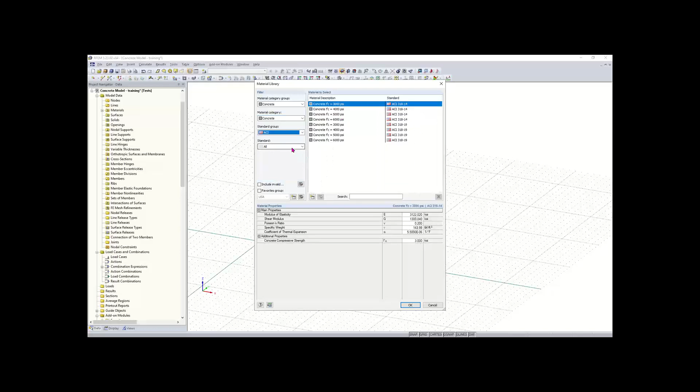So I'm going to go up here to new rectangular surface, and now I have my thickness here, so I'm going to keep that as 8 inches. Again we have our materials, so I'm going to go to import material from material library, and I want to make this concrete, 4,000 psi concrete. I'll click OK, and I'll click OK again.

Now I'll click on my origin here, and this slab is going to be 46 by 40 feet. Instead of having to rotate my model, I can just hit the top-down view here and hit reverse in Z direction, so I'm looking from top down. This is going to be 46 feet in the X direction and 40 feet in the Y direction, the height. So I can move that up, 46 by 40. I can right click anywhere or hit escape, and now you can see we have our slab here.

So now that we have the slab or the floor, we can work on adding in our columns. The columns are going to be perpendicular to the slab.

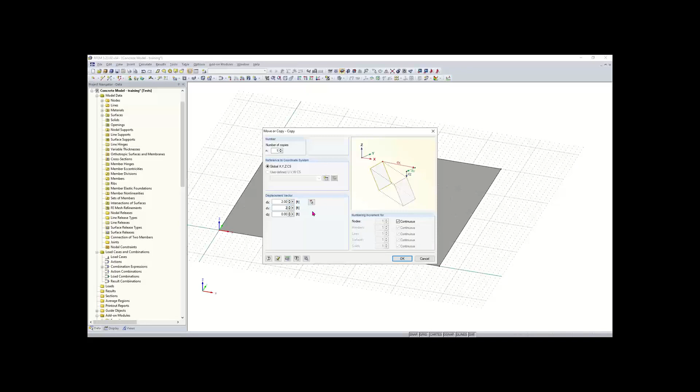I think the best way to do this is to simply highlight our corner node, our origin here, and make a copy of this node. I'm going to go to move and copy, make one copy of that node, and move it 2 feet in the X direction and 2 feet in the Y direction. Now that I've entered that information, I can click OK, and you can see I made one copy 2 feet in the X and Y direction. That'll be the placement of our first column right there in the corner.

Now I want to do the same thing for 2 more nodes, going in the X direction. I'm just going to click on that node and go to move and copy again, and make 2 copies of that node. I only want it to go in the X direction, so I'll type in 16 feet and click OK. Now you can see I made 2 more copies in the X direction of that node, and that's again where these nodes are going to be the base of our column.

I want one more column here at the corner. This is going to be symmetrical, so we want it 2 feet away from this node here. I can simply hold Control, left click, and move it over there. You can see the grid points here that I can snap to as well. So there we go, we have our first row of nodes that are going to be our columns.

Now what I want to do is have 3 rows of columns here. So I can just rotate this floor here, then hold Control and select my nodes, and make a copy of those. The move and copy tool is pretty useful, so we can make 2 copies of this row of nodes and just move those 13 feet in the Y direction.

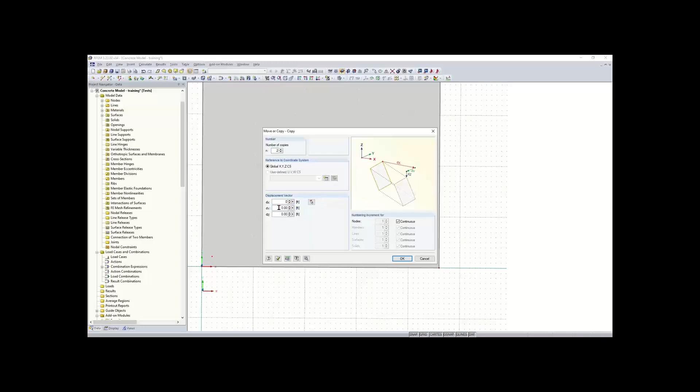I'll click OK. And now you can see that we have our additional 2 rows there. So after that, the arrangement of column nodes is right here as follows.

Something else I would like to mention is just under the display tab: once you have a large model and it includes a lot of different nodes and lines and elements, if you go to your display tab here, you can check off numbering, and this will just give you numbers in your work window. So you can see I have line 4 here and then different numbered nodes. So it makes it easier just to stay organized, and also for reference as well.

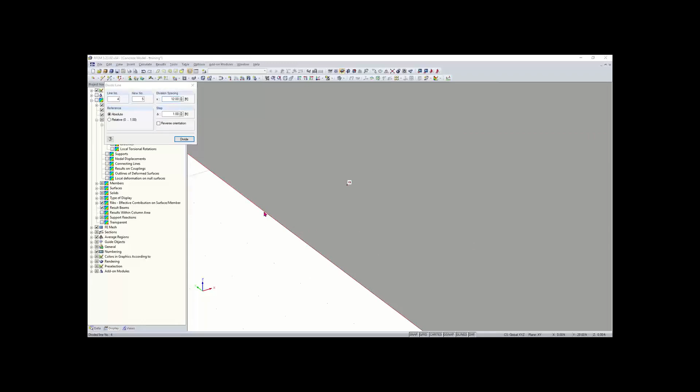So now we want to define our walls. And to do that, we can simply divide our lines here like we did with the plates earlier. So we can right click on line 4 here, and what we want to do is go to divide line and then go to graphically. And then this wall is going to be placed right next to this node here. So I'll left click and divide that line. And now you can see I'm still in the divide line tool. I can right click out of that.

And now we can do the same thing for this line up here at the top. I'm going to click on it, right click, select divide line graphically. And just to reiterate what graphically means, you can see I can just snap or place the node wherever I want to on the line graphically using my cursor. I'm going to place it right here. This is going to be 28 feet from the start. So I'll place that, and now you can see that we have 2 lines now with the node placed at 28 feet from the start. And again, if you're confused about the orientation of your line, when you hover over your line, this red arrow tells you the direction.

Now we can move on to creating our semicircle surface, which is going to be used for our spiral staircase over here. We can go up here to new rectangular surface, and instead of clicking this, we can hit this drop down button here. You can see we have a list of different shaped surfaces, along with being able to do a polygon, or you can select the boundary lines of something and create a surface as well if you don't see the shape here. And what we want is semicircle. Similar dialog box, everything here is fine.

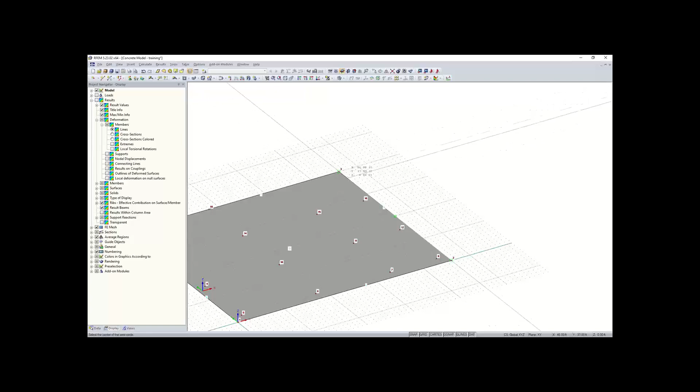We can keep that. And now I can just simply draw what is going to be the radius of the semicircle. The radius is going to be 7 feet. So I'll start at node 3 here at the corner. Actually, that's not where I want to start. I want to start 7 feet away from that node because you start from the center. That'll be at 4640, or my mistake, 4633. So we'll start at 4633, draw this so the radius is 7 feet, and we'll end it at the corner there. And now you can see we have our semicircle surface here attached to our rectangular.

And so now, after surface 2 has been created, we can work on our ceiling slab. This should be pretty easy since our ceiling slab is going to be basically the same as our floor slab. We can highlight our floor here, and then we're going to move and copy it. Something to keep in mind is that there's going to be a clear height. For this concrete building, there's a clear height of 11 feet between the floor slab and the ceiling slab.

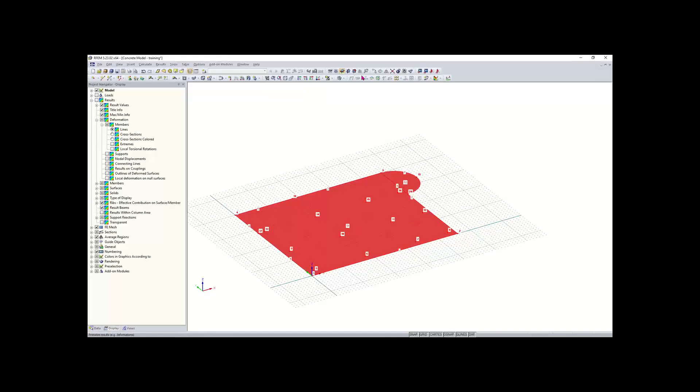We also want to take into consideration the thickness of these slabs. So we are going to take half the thickness of each slab and add that to our 11 feet. Taking the thickness into consideration, that's going to be 11.83 feet in the Z direction, and we're only going to make 1 copy. We'll click OK. And now our ceiling slab is created, which is not the correct height. So to change that, I can Control Z.

And I'm going to redo that. Move copy. Oh, I typed in 1.83. That makes sense. So 11.83 is what we want. And now our ceiling slab is created with the correct distance between them.

The next thing we want to do is to maybe check out some different views. So if we click on isometric, we get our isometric view here. Maybe we want to take a look at a different perspective, so we can check on our perspective view. And then we can look at the reverse in the Z direction, and we can see if we didn't have perspective view on, you wouldn't be able to see that there's two slabs here. So if you turn that on, you can get a better look at maybe some elements that are lying on top of each other.

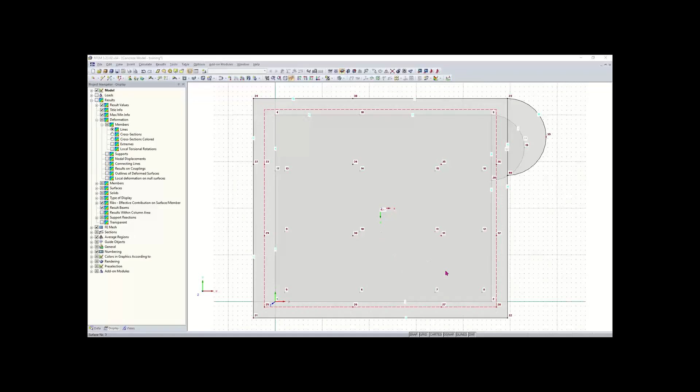Now we want to create the walls between these two slabs. So to do that, we're going to first merge these two surfaces here. So what I want to do is I want to divide this line here. So I'm going to right click on line 16 here, and then I'm going to divide it. And I'm going to divide it by distance. And I wanted to divide it right in the middle. And now that that's divided in the middle, we have two different lines here now, 16 and 17.

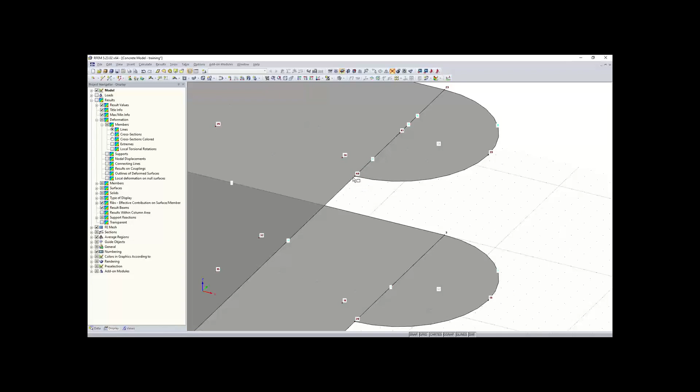And so now what I want to do is connect this line to this line at node 40 here. You can see that this line is one whole line. So if I go up here to this tool called connect line/members, I'll click on that and I'll highlight my node there. And you can see that what that did was split that line at that node and connected them, creating two different lines and an intersection.

So now we can delete our top surface here for our ceiling. And so we'll select the two surfaces by holding Control, delete. And the reason I did this was so that we can delete these two lines here, 16 and 17. I have two lines lying on top of each other, so I'm going to delete 16, 17, and 18. I just do that by clicking on them and hitting delete.

We also can delete those lines by going to the project navigator, just for example. So if I wanted to delete these lines, I could go to data, and then I could go to lines, and then I could hold shift and select 16, 17, and 18 and hit delete. And now we're just left with this outer boundary line and node 40 here.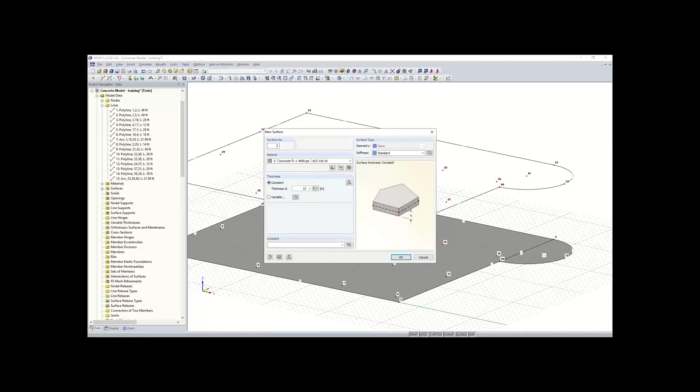So now what I want to do is just recreate the surface by going up to my surface tool here. And then I can hit this drop down and select boundary lines. So this is pretty easy. This is a very abnormal shape here. I want my ceiling to have a thickness of 12 inches. Everything else is good here. All I need to do is select this boundary line, and you can see that the surface has been generated based on that boundary line. And we also kept node 40 here, which is very important,

because now what we want to do is add in an opening right here for our spiral staircase, and we can use node 40 as the center of that opening. So right next to the surfaces tool, we have an opening tool. Right now it's set to new rectangular opening by default, but if I click on the arrow next to it, I get my options for other openings. So I want a circular opening. And now I can just click on node 40 and automatically the circular opening will be set.

So right now selecting this graphically is a little bit crazy. So what I can do is go up here to this window that I have open. I can select step and I can make the step just 1 foot. And now you can see that I can create my opening, and each time I move my mouse, it's just 1 foot. And so then I can also just type in the radius of this opening, which will be 6 feet, and I can hit enter. And you'll see that RFEM automatically integrates that opening into the surface here and gives us a nice symbol for our opening as well.

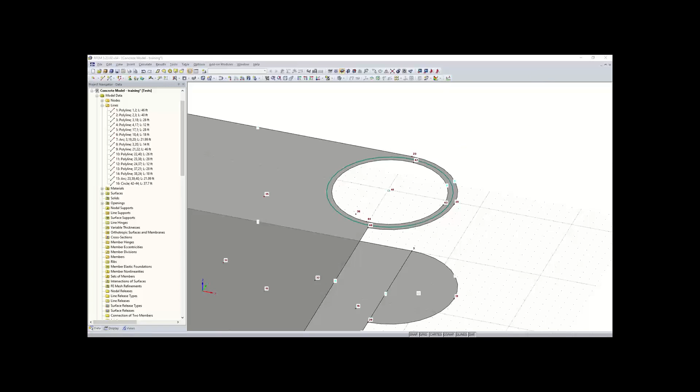So I'll hit escape, and that tool will close out. And now we can get into defining our walls. So maybe I'll go back to an isometric view and I can rotate the model so the staircase is in front of me.

And now what I want to do is create some new lines. And I also need to create some new nodes here on this line. Well, I don't need to create a new node there. I can just go up here to new line. And basically what I'm doing is just connecting the floor to the ceiling with this line here, which will act as our wall boundary. And this is going to be about 7 feet away from node 20 here. So that will be at 4619. So we'll go to 4619.

I'll draw up to the line, and again, you get that nice symbol there, that snap point for perpendicular, kind of like AutoCAD, and there you go. Now that line's there, it's perpendicular, and now we just want to create some other lines for our boundary, for our walls. So the next one will be 12 feet away from node 3. So we'll go over here to 3440. So that will be right here. And now I can go up to my line here, get that nice symbol with the perpendicular. And now we have those 2 lines for our walls.

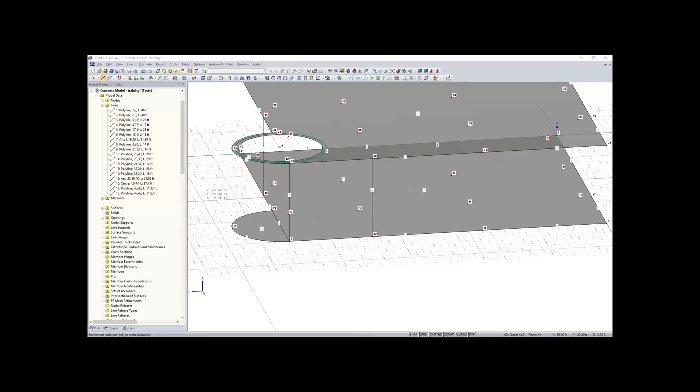And now we don't have to create any more nodes here, we can just simply connect our nodes here, 3 and 23. Let's see, 20 and 40. What else? 4 and 24. Oops. Looks like I created a line there. Control Z. I can go back up to new line and just connect 4 and 24. And then we also want to connect 18 and 38 and also 17 and 37 here. And again, these are just creating our boundaries for our walls.

So you'll see now that we have our lines here, but one last thing we want to do is connect all these lines and split these lines at their connections. So we can go up here to connect lines or members, highlight the whole model, and that will split our lines at those intersections. I'll right click out of that. And something else to note, alternatively, if you've turned off auto connect line/members like we did in the beginning, and you just want the line to split the intersection while drawing, you can go here to detail settings, and then you can just select auto connect line/members if they contact here under your line drawing. So you can keep that on if you want. We can exit out of that.

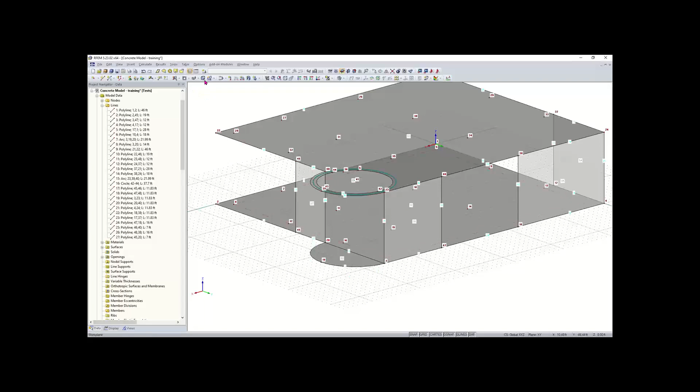And then we need to create the wall for our staircase here. So since this is out of plane, basically this needs to be a quadrangle. So we'll go up here to this tool called New Quadrangle Surface, and this is going to have a thickness of 8 inches. We'll click OK, and then this is basically like selecting boundary lines. So we'll select those, and now our quadrangle surface is created there.

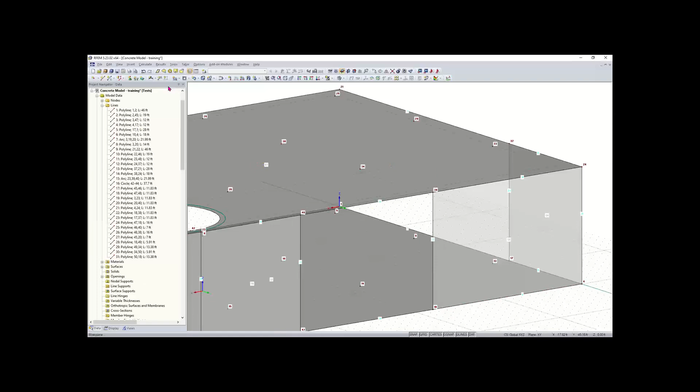Let's see, we created our walls. The last wall we want to create is our inner wall here. So I'll go up to rectangular, and now I can just create a wall here for our inner wall, and that will go up to node 34. And that did not create correctly, so let's see. We want to go back, Control Z, and we want to make sure our work plane is in this plane. So this would be the YZ plane. So we'll go up to YZ. Again, you have your work plane options up here to change the work plane of your grid here.

And then what we also can do is we can change the origin. So there's a button here called Set Origin of Grid/Work Plane. We can click on that, and then I can set the origin to node 18 here. And now I can draw that rectangular surface correctly. I'll click OK, and then I'll select node 18 and node 34, and now you can see that my wall there was created.

After that, we want to now create our columns. So I can set my work plane back to the XY plane, and then I'm just going to connect these nodes that we created in the beginning with a line. So I'll pick node 5 and 25, and then what you can do is you can turn lines into members basically by double clicking on them and then going to member.

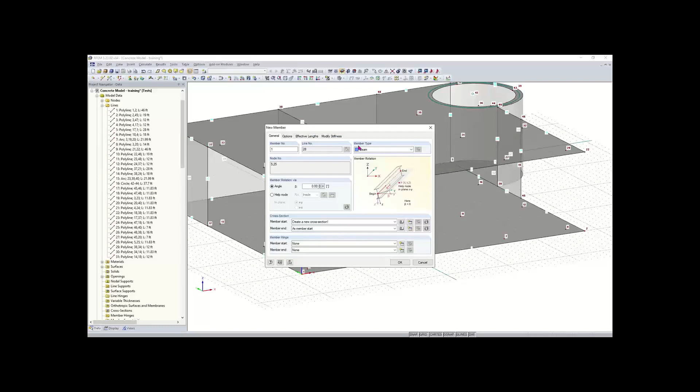There's some tabs up here. If you go to the member tab and then available, and then once you hit available, it's going to ask you, okay, what cross section do you want this to be defined as? We'll go to import cross section library. And this is going to be a rectangular parametric concrete massive section. And the dimensions of this are going to be 14 inches by 14 inches.

Again, our material set here at the bottom, it looks like it's by the older standard by default, so let's go to import material library and make this for the newer standard. We'll click OK. So we have our concrete 4000 psi. We'll hit OK again, and then we'll just keep hitting OK through these dialog boxes. And now you can see that my member here, my concrete column, that line that I connected those two nodes has been created or transferred into a column that we defined.

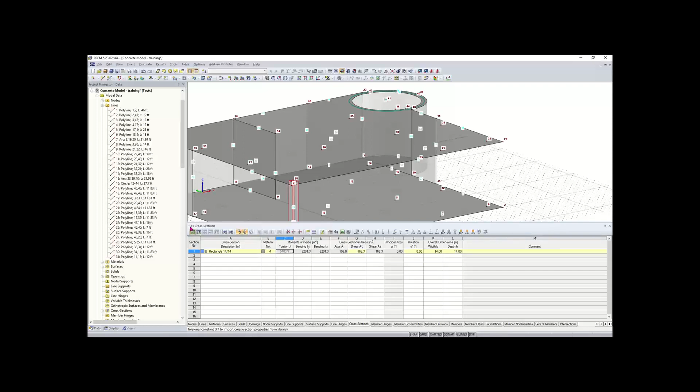And you can also see this in the table. So if I turn on my table up here, maybe we want to get a look at our cross sections in our table. So we can go open our table and we can go to members. And we can also go to cross sections. And under the cross sections tab here, you can see we have our cross section listed. And we can also change this cross section from here as well if you would like. And you can also see up here what table you're in if you need to reference it. It's 1.13 cross sections.

So I will close out of my table, and now we want to create the rest of these columns. And instead of having to manually do that, we can simply just, again, use the tool, highlight, and then hold Control, and then drag. And you can see that will just create a copy. And there you go. Now we have our first row of columns there.

Another way of selecting columns is going up to the special select option here. It's called special select tool. And what this does is allows you to select elements within your model based on these categories here. So let's say I want to, for example, select members. I can activate that, and I can activate all members, or I can select based on various options here based on material, type, number. We want to select based on cross section if we want to select all of our columns here, and we can select based on the 14 by 14 cross section. I'll click OK, and now you can see that all of those cross sections have been selected.

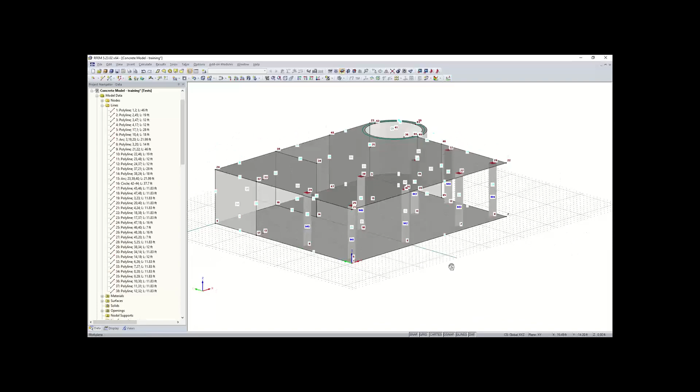And this is handy because now all those are selected, so I can just hold Control, drag, and drop. And now all of my second row of columns is created. And finally, now we can just do one more column. We can just select a random one, hold Control, and connect 15 and 35 to the floor and ceiling there.

And so the last thing we need to do for our model data is just add in this downstand beam. So there will be a downstand beam from the edge of this wall here, node 37, all the way to this column, node 35. This node 33 here is not needed, so I'll select that and delete it. And to add in this beam, I can simply just repeat what I did for the column. I can use a line, or I could just simply go to new single member.

And then I can, under new single member, for this downstand beam, it's going to be a rib type. So I'll click on rib. And then for the rib type, I want to go to edit member type. There's an edit button right next to the type there. And we want to select the option on the positive Z, local Z side of the surface. And you can see that's under position and alignment.

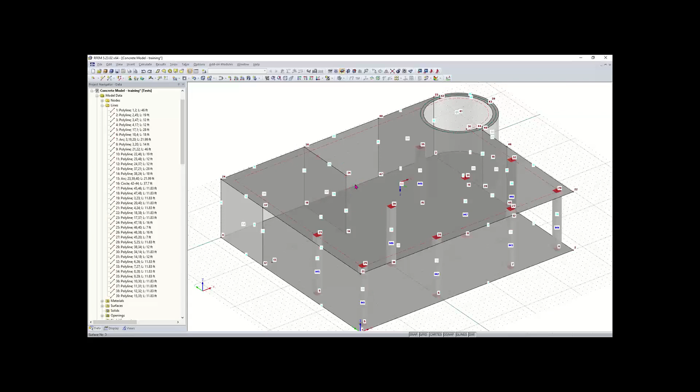Oops. Now we can draw our rib, which is not correct there. Oh, I see. Okay, so what I can do is just exit out of that tool, go to new member, click OK. Need to redefine these. It's all good. And now it's asking me for the line. So I will have to create the line.

And I'll connect the wall to the center wall there, and then to the column. And I'll go back to my new members, click OK. And then I'll click OK again. Everything's defined here correctly. And then I'll select this line here. And now we have our downstand beam. So now that that's defined,

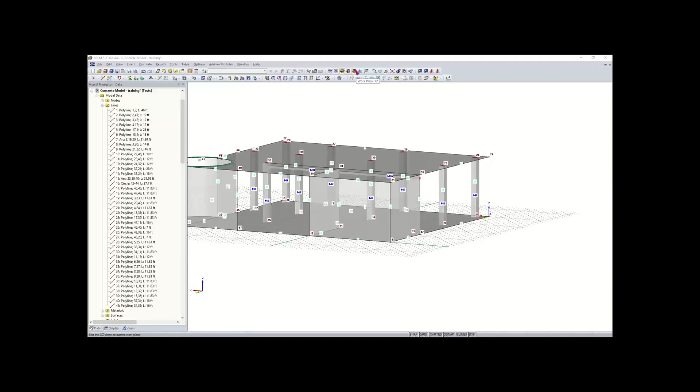the next thing we want to do is add in an opening to our back wall here. So what we can do is we can go up here to our openings, rectangular, and then before we draw this opening, we need to make sure our work plane and origin is set in the correct orientation and position. So this work plane is going to be in the XZ plane. And then the origin is going to be at the corner here.

And now we can draw our rectangular opening. And that's going to start at the top left here at 1408. The coordinates, 1408. We can snap to grid points right here. And then we can just simply draw that. And that's going to end 503 right there. And now our opening has been created, our back window there.

And the next thing to do is to add in supports for the structure. So all of the surfaces and all the model data there is created. We just need to add in the supports. And so the supports are going to consist of line supports. So we're going to assume that the foundation over here on this left-hand side is adjacent to another building. So we'll add in line supports there. And we'll go to new line support, create a new type of line support.

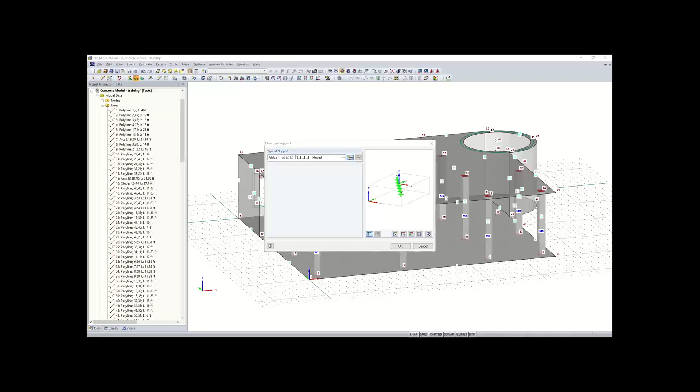And the only thing we want to be fixed with this line support is the translation in the Z direction. So all of these will be released. The translation in the X and Y will be released. Rotation will be released. The only thing we want is just support in the vertical direction. So we'll click OK. And again, and then I can just simply select my lines here and add in that line support.

So the next type of support we want to add is a surface support, and this will be the foundation for our floor slab for surfaces 1 and 2. So I can just select surfaces 1 and 2 and go up here to new surface support. And within here we can define our surface support.

So we can just simply create this foundation basically. So within the Y translation and the X translation, we're going to have a spring constant of 64 kip per cubic feet. And then in the vertical direction, we will have a spring constant of 640 kip per cubic feet. Well, Y and X are going to represent the shear capacities of the surface, and then the Z is going to represent the soil.

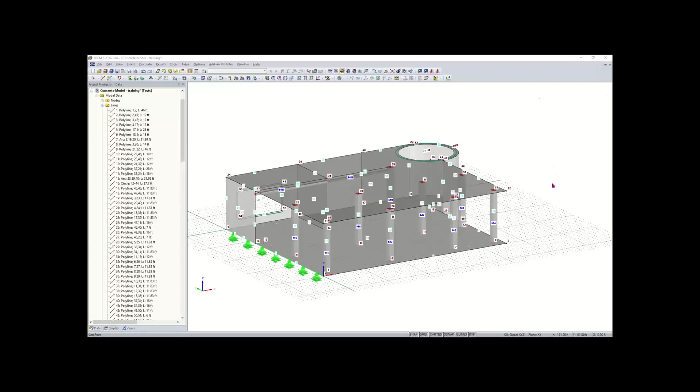And then we can move on to adding stiffness modifications based on the standard, or based on the ACI standard. But it does look like we're running out of time a little bit here. So I was just wondering, or we could take this time at the end for a discussion, if anybody has any questions so far that they would like to have answered.